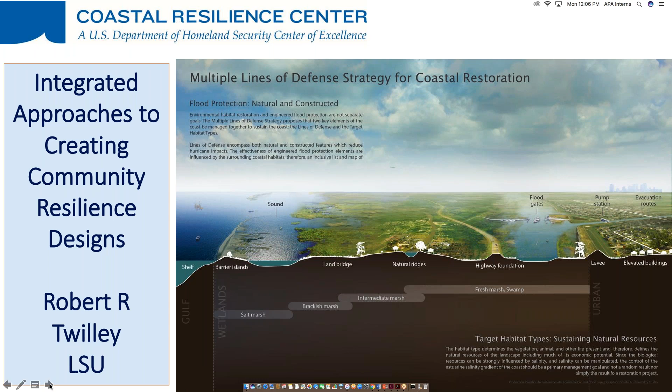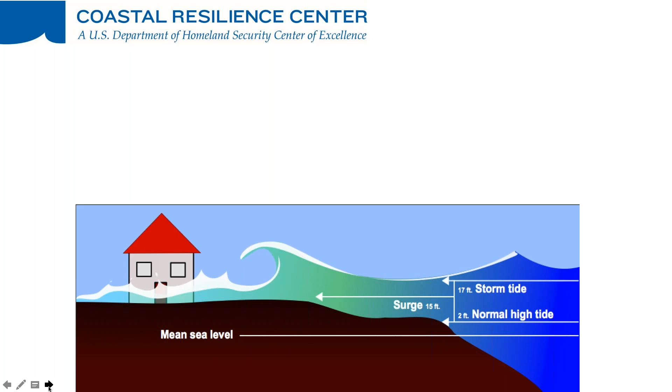There we go. So the issue is infrastructure and storm surge. And just to give you an idea of the magnitude, this is actually outdated. This is from the 2012 master plan. The potential for expected annual damages to reach 7 to 23 billion. And much of that is from flooding and damages due to hurricanes.

And of course, this migration that I talk about, I could spend a whole seminar on it, but basically the land is subsiding and sea level is rising, but more importantly, we don't have the capacity of the river with the sediment in that river to help build elevation to compensate for sea level rise and subsidence.

And thus, those rates of 17 kilometers of the Gulf of Mexico migrating inland is also a big part of the way we manage the river, as in all deltas around the world. But those are the damages, those are the source of those damages. And so our restoration program is to build land with the river, sediment from the river, and reduce risk.

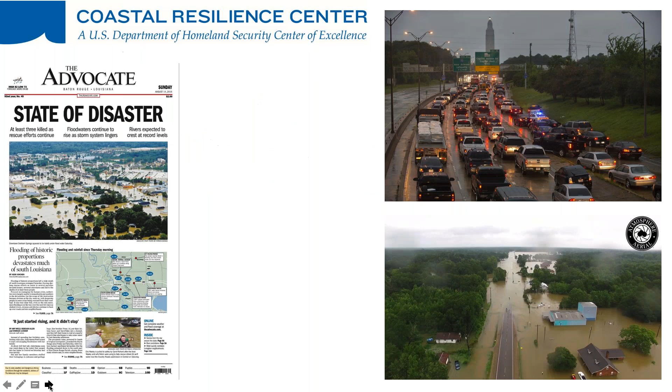Now, we are also dealing with flooding, not only from coastal storms, but as many of you know, from August. In fact, we're about to celebrate the anniversary of the flood of 2016, the Louisiana flood, actually a flood and a storm with no name. But we are also dealing with this interior. In the Gulf of Mexico, the point here is not only a source of flooding from storm surge, but we're dealing with the more interior flooding as an additional issue of reducing repetitive losses.

And so all of this brings us to this tool, which is a visualization tool for storm surge. And we call it See the Storm Surge Before It Happens, which means this is a deterministic model of a specific storm. It is not a probability of multiple storms. It is very specific, and the track and the conditions of the storm can be manipulated to look at scenarios. And it's called CERA, which is a Coastal Emergency Risks Assessment. That is a visualization tool that I'm showing you to the left.

And as you can also see in the bottom right, a very large group of universities has been involved in building this. A large part of this is actually the engine that runs the simulations of the storm surge, which is called the ADCIRC Surge Guidance System, ASGS. That's in the background generating output that tells us the elevation of water at different locations in response to a hurricane or major event. Our visualization tool that you see here expresses that in Google Maps so that you have some idea of where those water elevations would be located.

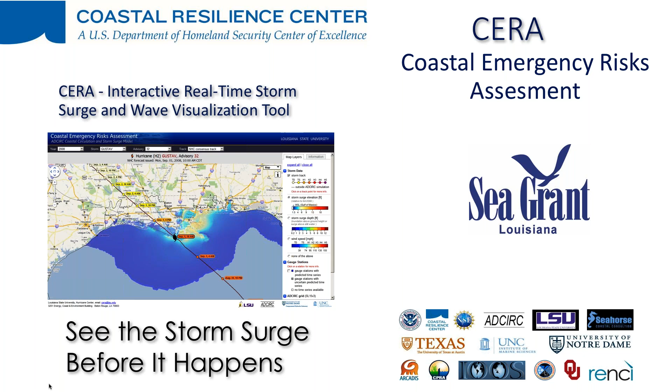And so it was developed actually to address the issue of critical infrastructure. It was actually designed over 20 years ago by Rick Luettich and Johannes Westerink at Notre Dame. Rick Luettich is at UNC Chapel Hill, director of the Institute of Marine Sciences, and built this ADCIRC grid in this model, as you can see off to your left, to help predict what the winds and water conditions would be around New Orleans at these very important canal systems, 17th Street Canal.

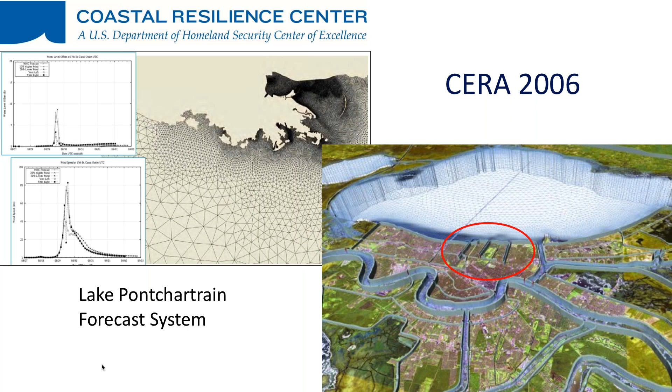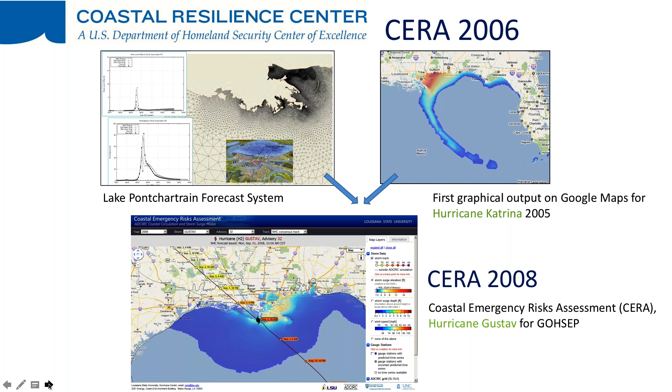And that's why this model has been so effective, is that it can, particularly in a coast like Louisiana, predict water levels around very complicated coastal structures and infrastructure and weirs and levees. And so it has proven to be very effective. Now, since 2005, particularly Hurricane Katrina, we elevated this to where it became a coastal emergency risk assessment, and put a lot of time and effort into visualizing storms during the events, being able to predict water elevations 5 days out, to know the expected risk during a specific event.

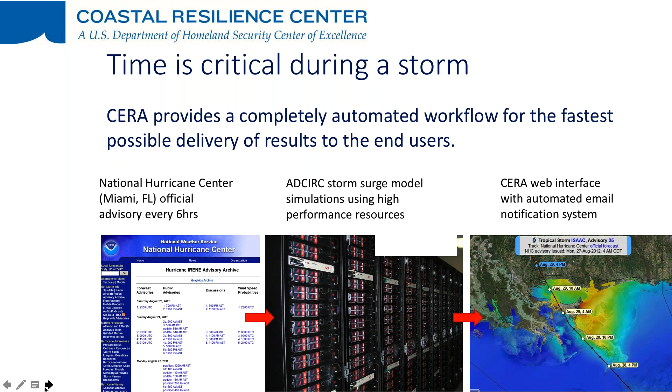It is based on the information we get from the National Hurricane Center, as you see to your left. And we're able to do this because in 2005, the state of Louisiana, as many universities have been doing, invested in high performance computing. Think about it, those are 1.5 million nodes or points where we're calculating water elevations. And so it takes high performance computing to be able to generate the maps that you see to your right, which is the interface of predicting water elevations during an event.

Now, the time is critical, and emergency managers want to know when water levels will reach a certain height. And so we have spent a lot of time with emergency managers in developing this tool, to help them relate to where people and infrastructure are located and planning during and actually right after an event.

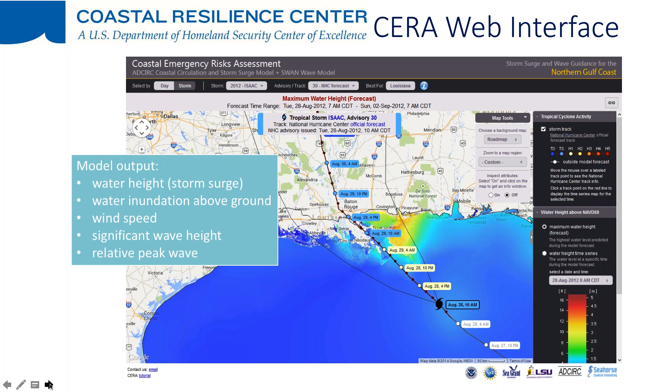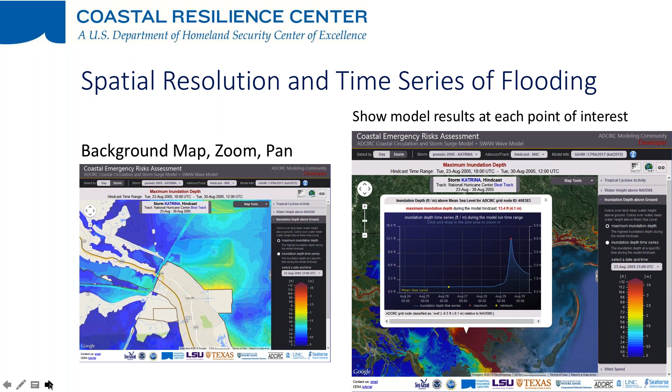Again, very deterministic, based on very specific information on where the storm will be located and the wind conditions of that storm. And so it has proven to be a very effective tool for emergency managers during emergency events. So the question is, how can we integrate this approach and create community resilience and designs using a tool like this and linking it with consequences so we can help with the design and enhance planning for the next event, in hopes of reducing risk.

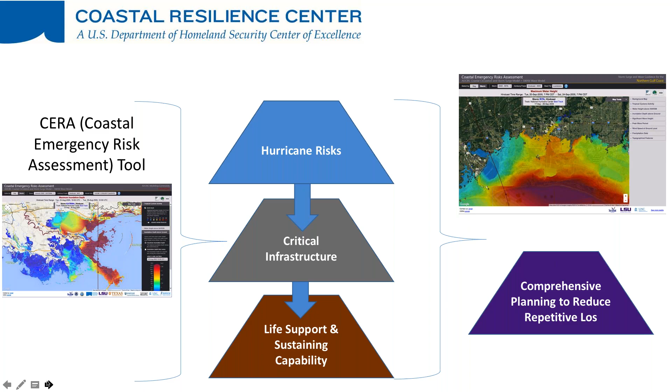And can we utilize these tools for designing green infrastructure, for looking at reductions in water levels with the same storm event? So basically, this integration is taking a visualization tool, knowledge about where critical infrastructure is located and where you would put critical infrastructure, and on the right, can we link this to comprehensive planning to reduce repetitive losses? And that brings us to working with planners.

So at LSU, we have the Coastal Sustainability Studio, which is located in our College of Art and Design, and is integrated with our College of Engineering and with the College of the Coast and Environment, where the Department of Oceanography and Coastal Science is, where I'm located. And it is to try to bring these integrated designs, looking at planning and adaptation and hazard mitigation. And so the question is, with this group, what's the value of a tool that can deterministically tell you what are elevations.

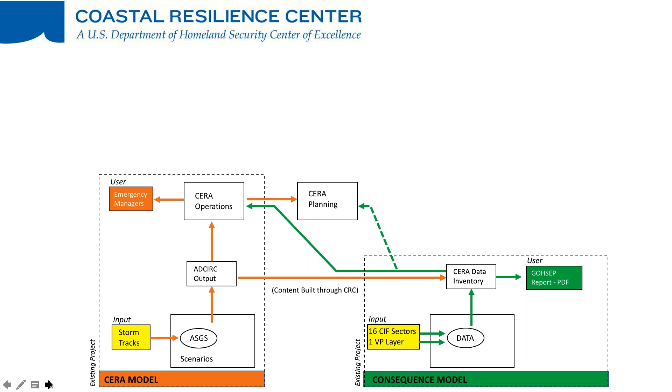So it is taking the CERA model, which is the forecasting or the visualization tool, with the consequences and data of where infrastructure is located, linking these up so that the feedback of where critical infrastructure can be inserted into these visualizations of flooding, and not only help in planning, but also help at the endpoint, which is for planners and users and emergency managers.

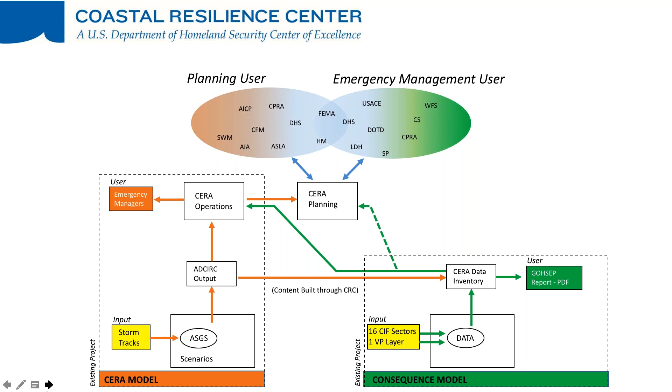Now, let me go back and real quickly say that I think the value of the CERA tool was because we spent so much time with emergency managers, and we found out from them, this is what we need during an event. So part of the discussion today is questions and comments, and is, from the planner or user, what is the value of these types of tools? I'm going to give you some examples. Now, before I do that, real quickly, before I wrap up here in the next 3 minutes,

I do want to mention this starts with a very large data set of where is the critical infrastructure. We had a very large FEMA hazard mitigation grant. GOHSEP is our Governor's Office of Homeland Security and Emergency Preparedness. And it was these GIS hazard mitigation maps that we started with, and you can actually find the maps at this portal. And this is with the Stephenson Disaster Management Institute.

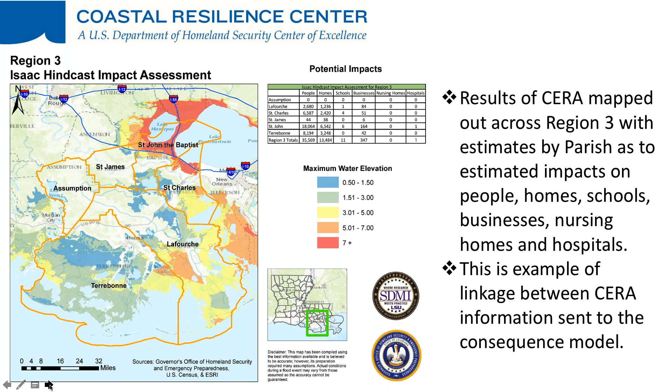So here we're taking some of the information of that critical infrastructure and overlaying it with a hindcast of Hurricane Isaac. And you can see potential impacts, people, homes, schools, businesses, nursing homes, hospitals that are influenced by different elevations during an event. I'm going to show you a little bit, scaling it down to St. John's Parish. We can actually look almost in neighborhoods to see what different infrastructure would be impacted given different hindcasts to look at impact assessment.

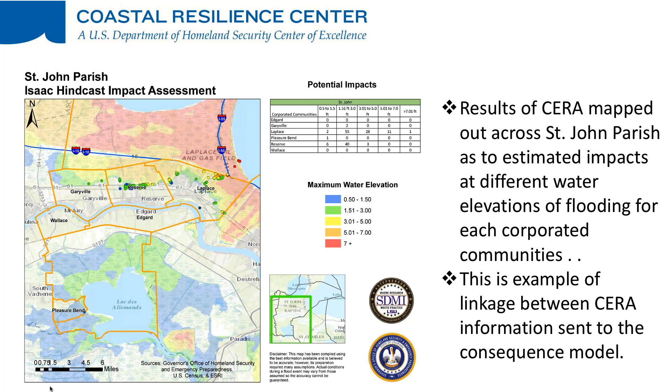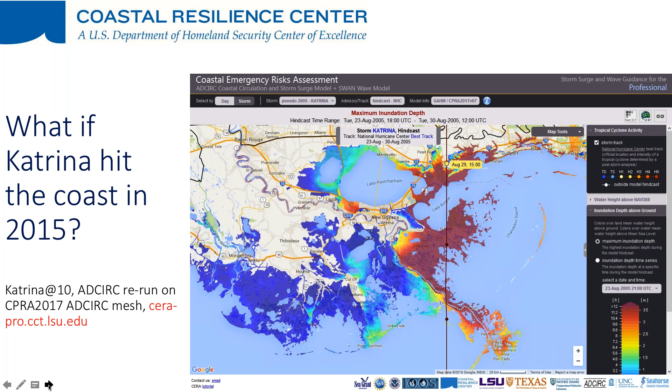And so this is sort of the idea here, for example, after all of the design went into the levees and some of the coastal restoration projects, what if Katrina hit today? What are the reductions in water levels? Taking a storm that we know what damage it did in 2005, look at it post investment in all the resilience infrastructure that has been designed and built since 2005, and look at the flooding. And that's, again, the power of this tool, looking at hindcasts of these events and comparing them.

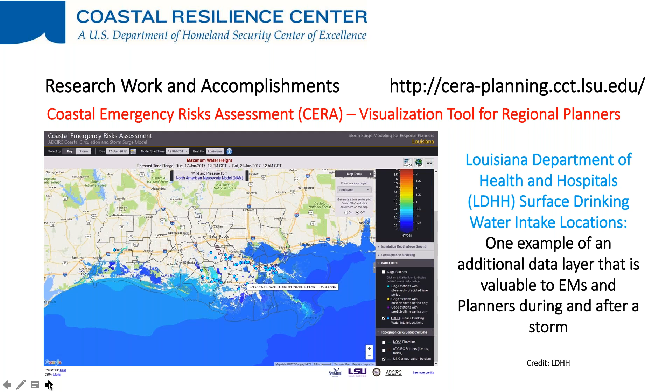And so, to give you another example, we worked with a focus group, and one of their top issues was, for resilience, we need to know where surface drinking water intake locations are. So we can look at different storm events and overlay those visualization tools where the intake locations are, to see if there's some design and criteria related to relocations and reducing repetitive loss.

We took a port resilience index that looks at their various indices relative to how well they are prepared to manage storms, and we can give them situational context, and give them storms and maps and visualizations, so then they can look at that relative to what they are using from a community resilience perspective, and how well does it apply.

That's sort of the goal that we have, and trying to look for and test resilience designs before the storms happen. And I'll stop there.

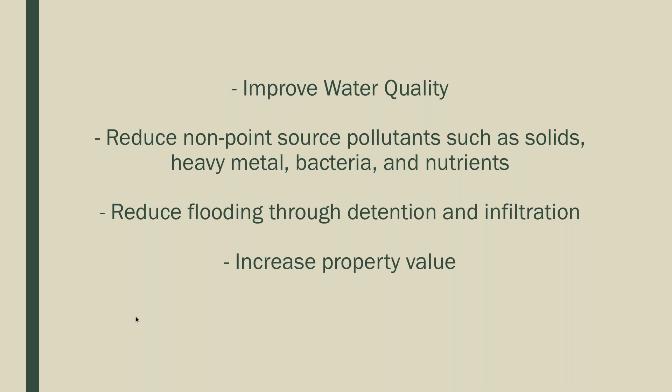So some of the objectives are to improve water quality, reduce non-point source pollutants, such as solids, heavy metals, bacteria, also to reduce flooding and increase property value as it brings urban design features that you will see in the next slides. So the first one would be green roofs.

Green roofs are proved to retain large amounts of rainfall, and they consist of a vegetative layer that filters and reduces rainfall. Some of the outcomes of using green rooftops are to reduce the urban heat island effect and also to enhance air and noise quality inside the buildings. And also it is considered an aesthetic feature in urban areas. So green roofs are mostly effective in urban areas.

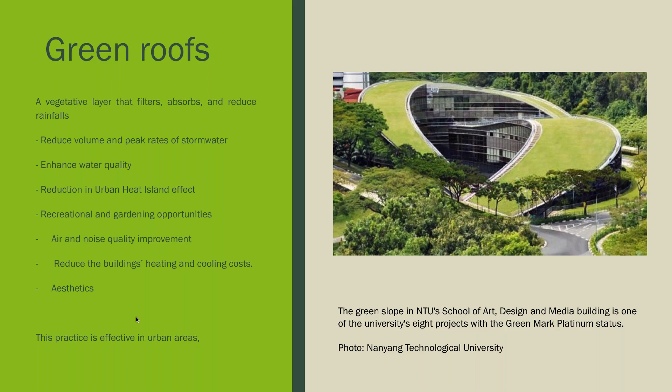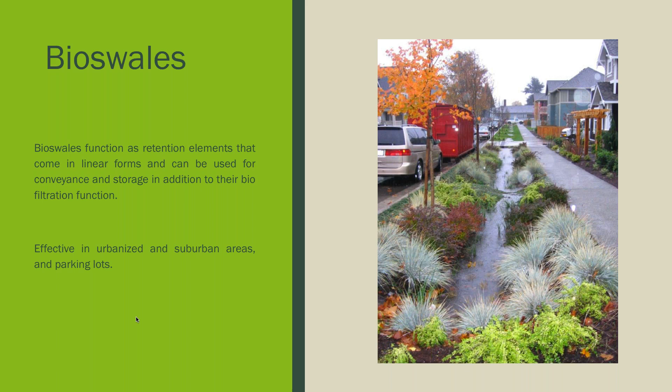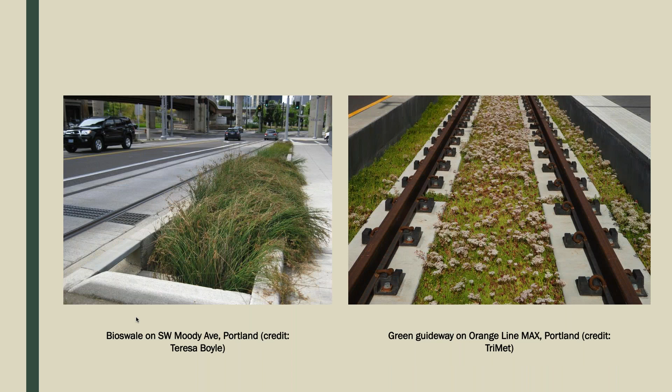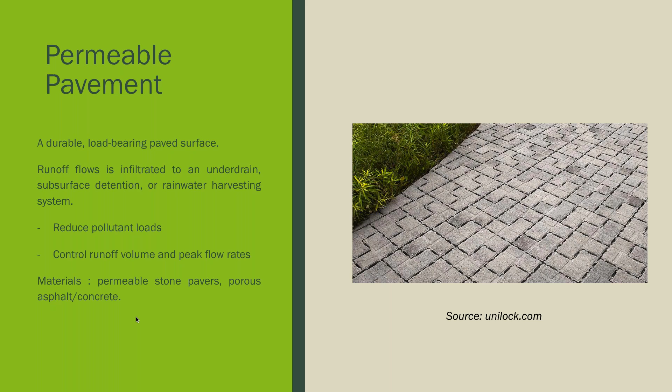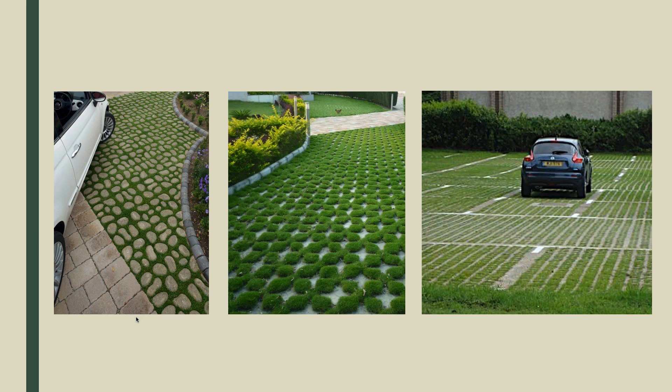So this is another kind of LID, which is the permeable pavement. This is a durable and load-bearing paved surface. The goal is to reduce pollutant loads through infiltration and also to control runoff volume and peak flow rates. The materials are generally permeable stone pavers and porous asphalt or concrete. Permeable pavements can be used in pavements around the roads, but also in parking. And that is why you can call it green parking, because of the surface that is permeable and reduces stormwater runoff. So these are other examples of grass pavement for permeability.

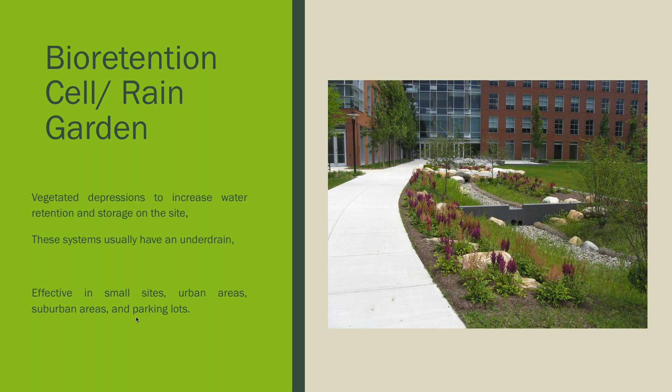Another example of LID would be the bioretention cell, also called a rain garden. These are vegetated depressions that retain water, and they are usually equipped with an underdrain, which is a concealed drain that lets the water through when it reaches the level of the drain. These practices are effective in small sites, in urban areas, in suburban areas, and also in parking lots. So these are other examples.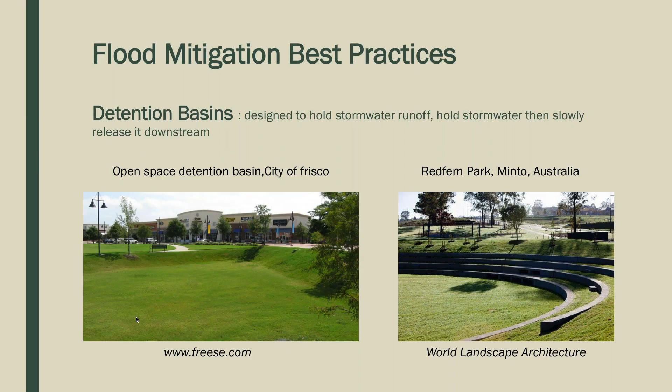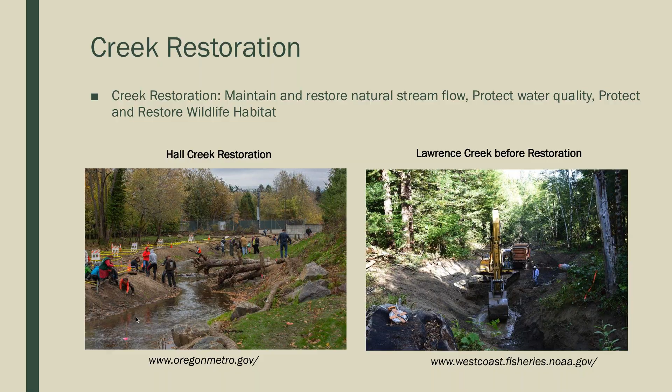So the overall objectives and benefits of green infrastructure are to reduce the urban heat island effect, which consists of higher temperatures in urban areas, and it also affects communities, the energy consumption in buildings, and air quality. It can also be the cause of increasing wind and the change of natural characteristics in an urban environment.

The most negative effect of urban heat island effect can also be the increase of greenhouse gas emissions. So the second benefit of green infrastructure would be the improvement of air quality, restoration of wildlife and natural habitat, economic growth and investment through the creation of green jobs and the implementation of green projects. Additionally, we can mention the reduction of flooding and the improvement of water quality, and finally, the creation of healthier communities and better environmental quality in the urban areas.

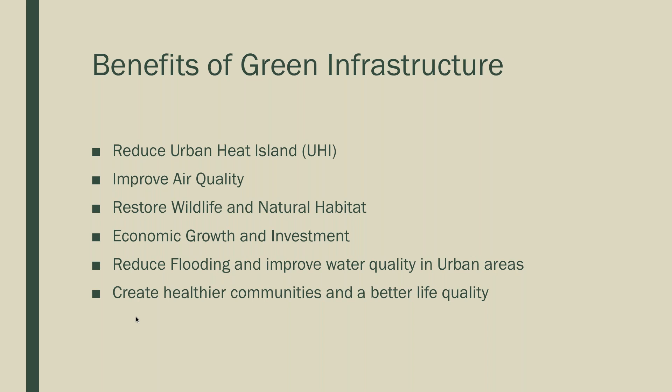Hi, so I'm Gwen Griffin, and I'm in the undergraduate urban studies program at Virginia Commonwealth University, and I'm going to be sharing a case study pertaining to green infrastructure. So the case study I'm going to be talking about is one from Kansas City, Missouri. And their goal was to prevent flooding after storms from the Middle Blue River, and then to reduce stormwater overflows.

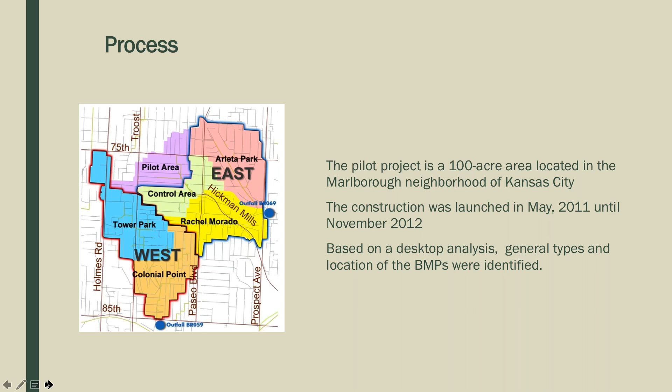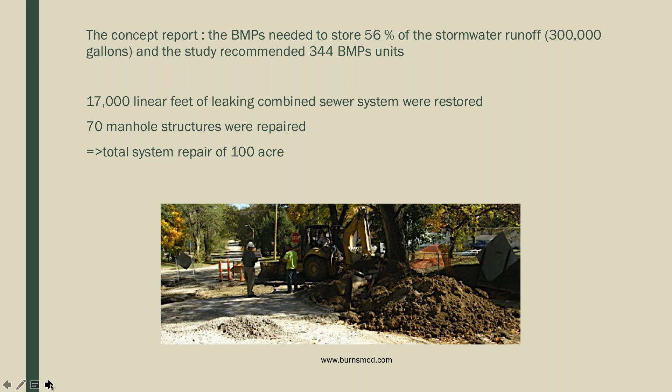So the Kansas City Water Department, along with their utilities department and their planning department, all got together and they created a pilot area to test some of the low impact development structures and best management practices. And it consisted of a 100-acre area within the city, and this project started in 2011. So a lot of the problems were repairing the sewer system and all the pipes underneath the ground, along with helping the water infiltrate slowly. A lot of those challenges came from the development within the city and how the sewer systems were set up.

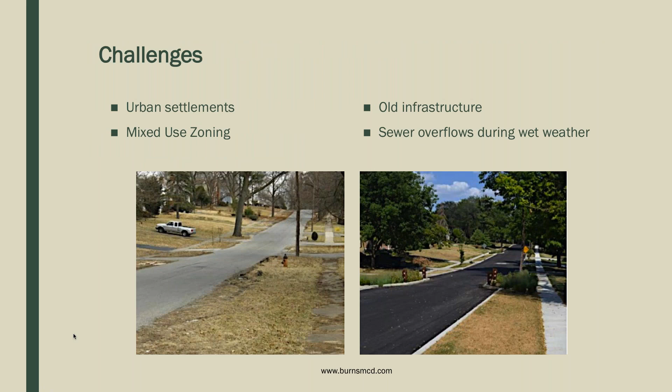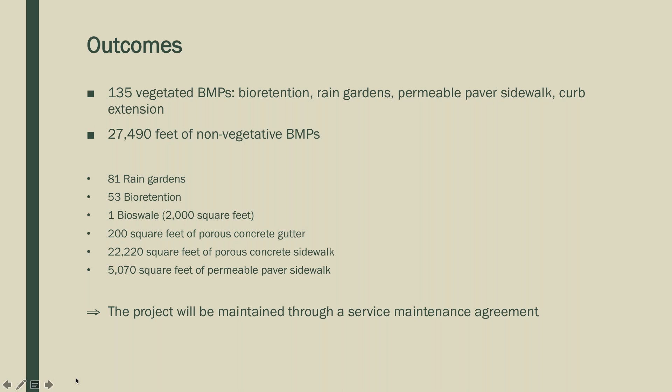So a lot of the best management practices were kind of what Samaya just explained. They used a lot of different structures such as rain gardens, putting in more permeable surfaces, curb extensions that were vegetated. So the best part about this project was the community and public involvement. They were able to get the community involved to maintain some of these, the bioswales, the curb extensions within the neighborhoods, and the different rain gardens.

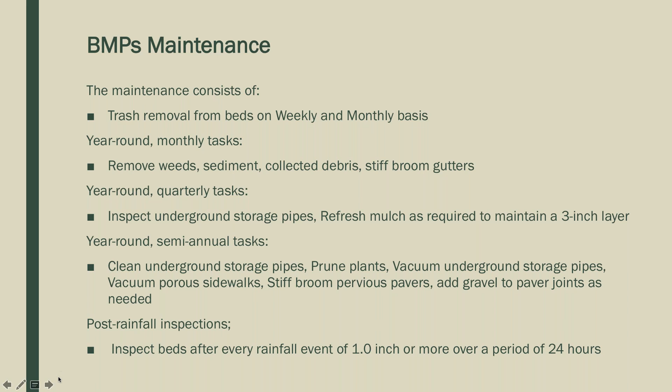Some of the practices and how they were able to get the public involved was meetings within the neighborhoods, going door to door, and then pancake breakfasts to get people out in the morning. And that's how they were able to talk about why it was important, how they can prevent flooding in their neighborhoods. So they were able to get a lot of nonprofit organizations involved in this project to help the Kansas City Water Department in order to decrease the cost. So overall, the city ended up with a pretty good project in reducing flooding and leaking within the pipes.

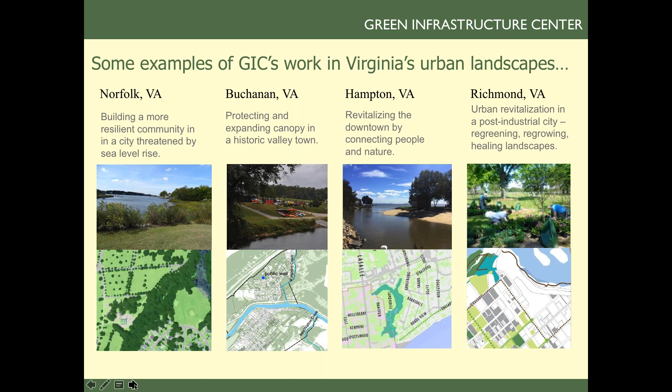And in Richmond, Virginia, which is our longest running sort of urban pilot, where we've mapped the entire city and then also have installed specific habitat restoration projects in the city to demonstrate how you can go from a city level planning to site specific solutions.

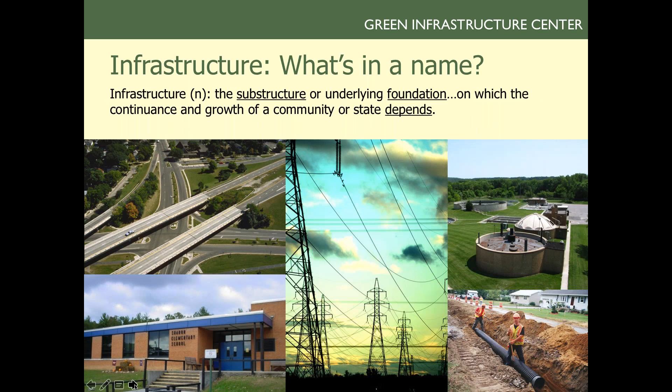So just quickly, I just want to take a step back and talk about infrastructure for a moment. We all know what gray infrastructure is: roads, power lines, pipelines, all the things that lead to civil society. So when we're talking about green infrastructure, not gray, so gray is on the left-hand side here. Green infrastructure is literally the green stuff: the trees, the wetlands, the lakes, all of the natural services, the natural resources that provide services for us.

So on the right-hand side, we add the tree canopy, and now we've got a key component of our infrastructure that's helping keep our cities cool, creating oxygen, taking volatile organic compounds out of the air, providing shade, and also uptaking stormwater.

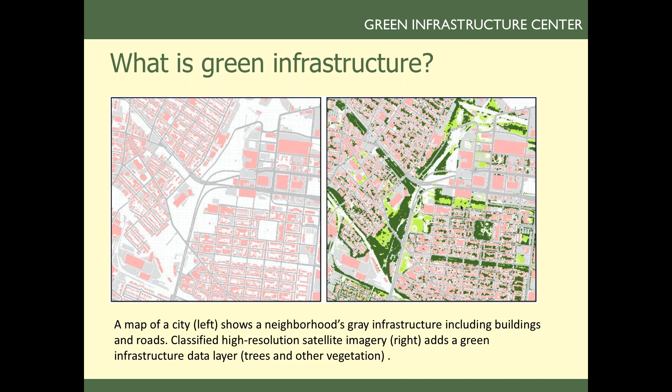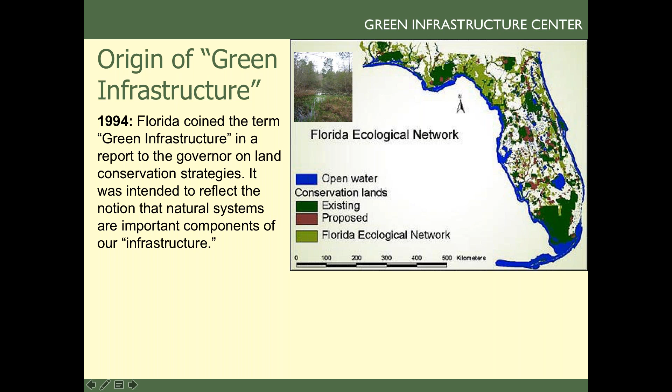So the term green infrastructure actually comes from Florida, and for those of you who may not know this, in 1994, state employees and folks working on a river conservation program came up with this term to try to explain to the governor that the natural resources of Florida were also part of their infrastructure. And when they talked about it, they were specifically talking about resources like Lake Okeechobee, the Everglades, the River of Grass, the wonderful forest in the Panhandle, the beaches, the dunes, all of these natural assets that create a healthy community and a healthy economy.

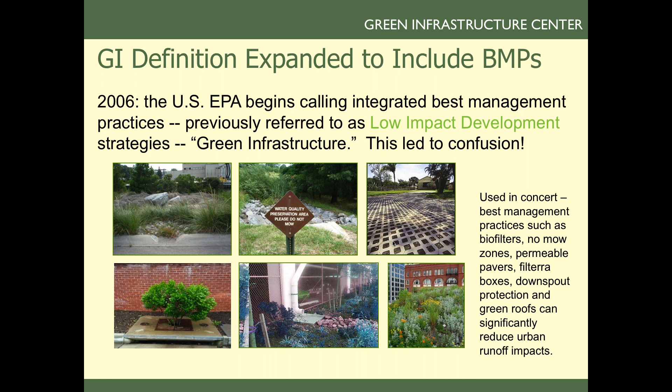In 2006, the EPA actually started calling everything green infrastructure. So previously, we referred to all these various best management practices as bioswales or Filterra boxes or green rooftops or permeable pavers as best management practices that used in concert create a low impact development strategy. And so now everyone got confused. Are we talking about trees and dunes? Are we talking about bioswales? What are we talking about? So the way that we look at it is we refer to natural green infrastructure and then constructed green infrastructure. But I want to remind everyone that trees are the original green infrastructure.

And why I bring this up, just very quickly, I work a lot with developers pretty much every day. And working with a nonprofit developer, they're very excited about their site plan because they told me that it had lots of bioswales, so it was going to be very green and I would love it. I asked them where the bioswales were going to go and they said, well, here, here, and here. But first we have to cut down these trees because they're in the way.

Now I'm sure everyone on the phone, I hope you're rolling your eyes at this point because we don't want to cut down trees to put in best management practices to try to replicate what the tree did. And in that particular example, they did realize that actually we should keep the trees. So I really like to harp on this because it's really important to first protect our natural resources. Trees give us all of these benefits first before we start constructing things. And also, trees are tremendous for stormwater management.

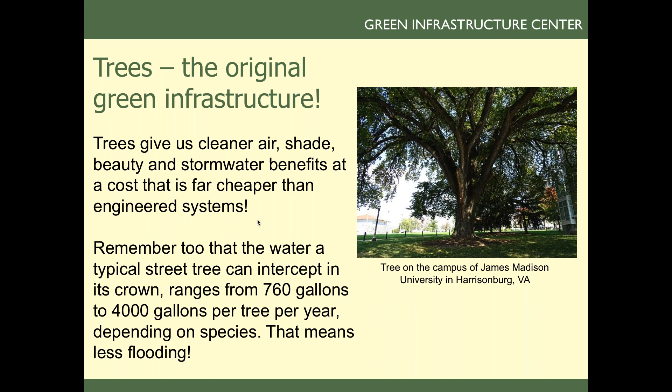We don't have to construct them, we can plant them, but a mature tree can take up anywhere from 760 gallons to 4,000 gallons per tree per year. And you multiply that times all the trees in a city, that's a tremendous benefit. It also means less flooding.

So, the key is right order thinking. Protect your trees and natural vegetation on site and across the landscape is step one. Build in the least impactful manner, smallest parking lot possible, smallest building footprint possible, and then mitigate. So first conservation and then mitigation.

And again, we ought to talk about that because we see so many site plans where they've removed all the natural infrastructure and then try to reconstruct what they've destroyed. So if we preserve as much on site first, we don't have to spend as much mitigating.

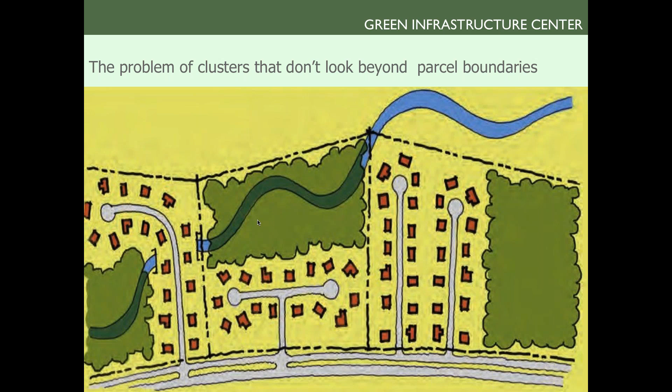So we also are very concerned about how much green space is left in individual development sites. And here's an example of 3 sites where each person left some green space. But if you notice that green space does not connect, you can keep the land connected, but only if you plan at a larger scale.

So here we have, if we've mapped our green infrastructure ahead of time, we know about our river corridor and our riparian zone and our buffers. Perhaps the site on the left is low or little in development, or it's a preserve, a conservation easement, or a park. In the middle, moderate development, and on the right, high-level development where you have room to accommodate it.

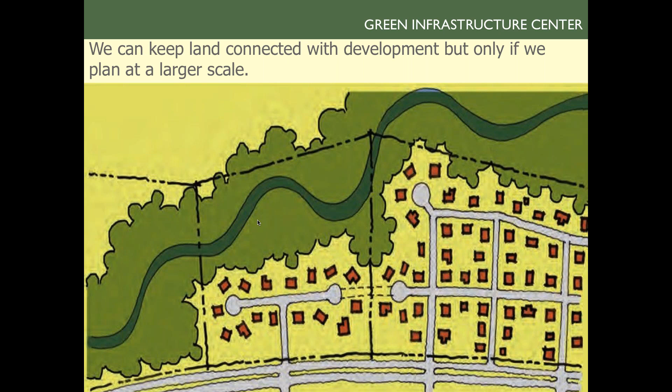But in order to do that successfully, you've got to have a map. And that's why it's really important that your community, your city, your county actually create a map ahead of the development so that we can realize these benefits.

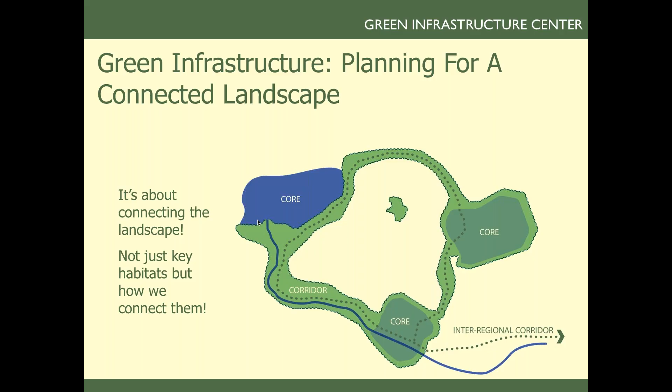So trying to think about a connected landscape, there are lots of tools and models, whether you're in the urban region or whether you're rural, to create a map of your largest intact landscapes and their connecting corridors. In Virginia, at the state level, there's a model available called VaNLA, Virginia Natural Landscape Assessment, and that has a map of all the largest intact habitat corridors, the sort of larger landscapes of 100 acres or more.

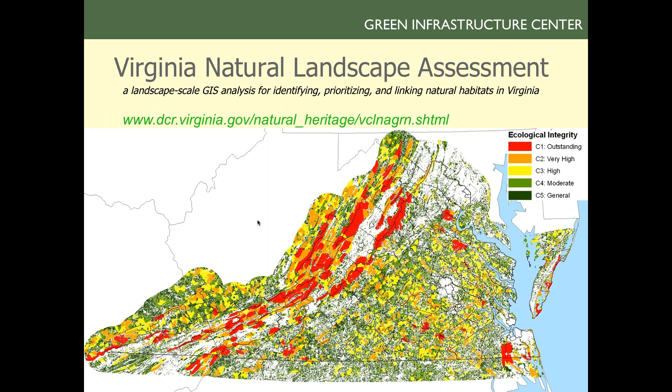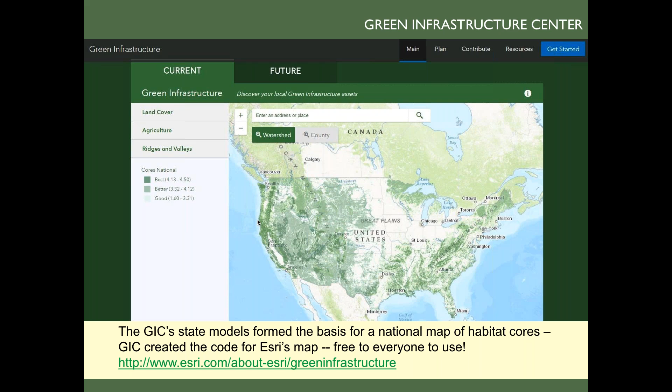And then if you're in another state, we actually built a model for Esri in the past year that you can go to and download the data for your state for anywhere in the country. And so you can just Google, don't try to write down that web address, but Esri Green Infrastructure. And you'll get to that model, and it's a pretty neat tool. And again, the data were created so that you could have them for free.

But there are many planning applications to this work. We talk a lot about stormwater management so far today, but lots of reasons to do this work, whether you're doing park and open space planning or heritage tourism, trying to figure out the most strategic places for conservation easements, road planning, etc.

Comprehensive planning is obviously something that most of us, I think everyone on the call does, but it's really important to make sure that your comprehensive plan has really good data in it. Oftentimes I find very bare minimum maps or just transportation maps, but often not good maps of natural resources. So think about how to get those involved.

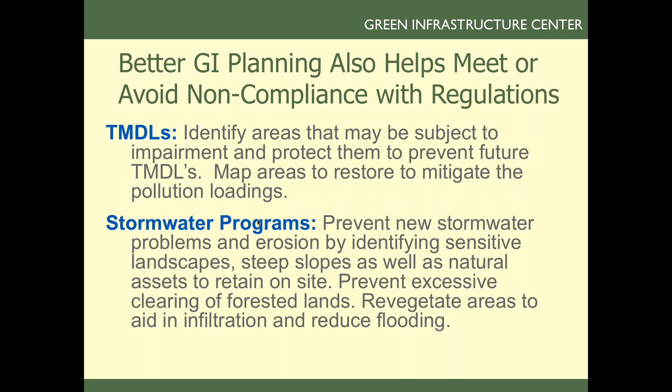And also think about the fact that this work can also help you with compliance with total maximum daily loadings of pollutants, TMDLs, if you have to figure out where you need to be most strategic in restoring, or stormwater programs. I'm going to talk a little bit about that.

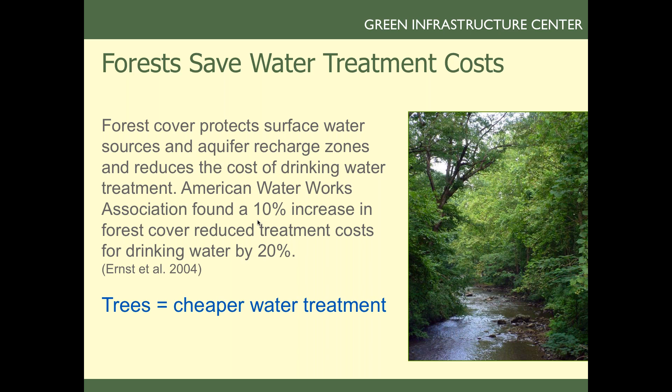So forests really help us with a lot of benefits. Again, the natural green infrastructure, American Water Works found that a 10% increase in forest cover can reduce treatment costs by up to 20%. So trees actually give you cheaper water treatment because the water arrives cleaner to your drinking water intake or your reservoir.

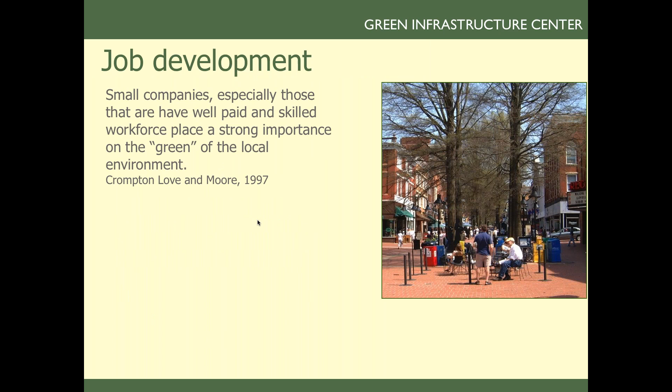Also, urban canopy values, people actually spend more and shop longer when there are tree-lined shopping districts. So it's worth investing in those street trees because they'll pay you back in tax revenue. Job development. So people are always talking about they need more jobs. Well, it turns out that the greener your community, the more likely you are to attract green jobs to your community.

And again, my talking time was cut by the panel being a bit behind, so I'm having to talk a little fast. Sorry.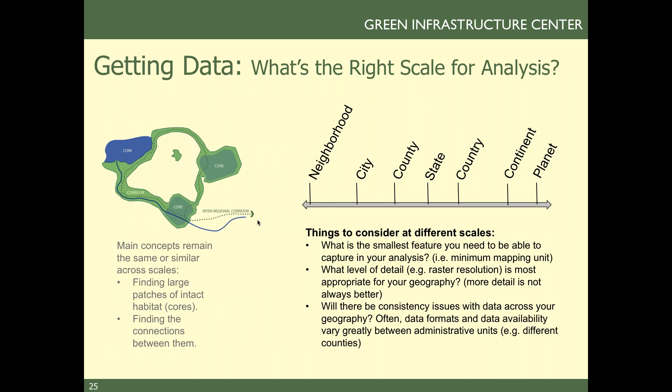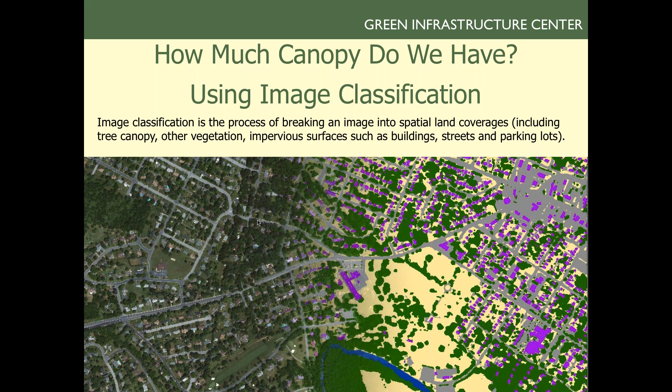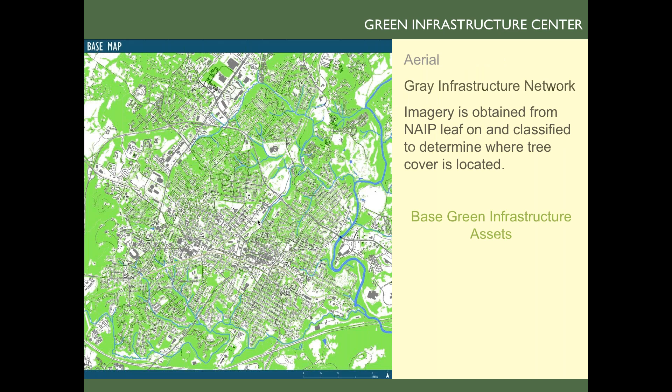So I'll just say that there are a lot of different things that you can evaluate for urban forest canopy, but that is the first step in trying to understand how well your trees are working for you in absorbing your stormwater. This is an example of Charlottesville, where I'm talking from now, just looking at gray infrastructure, adding in the canopy and the green infrastructure.

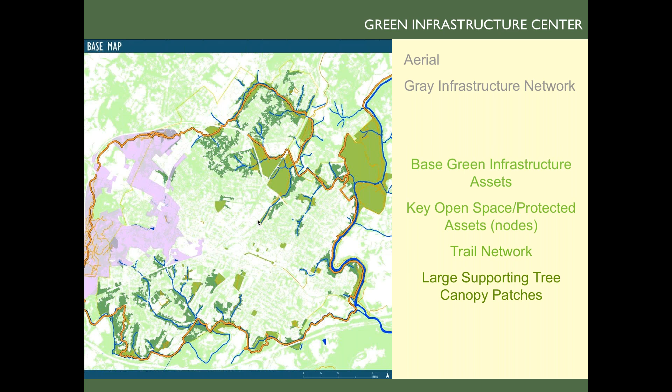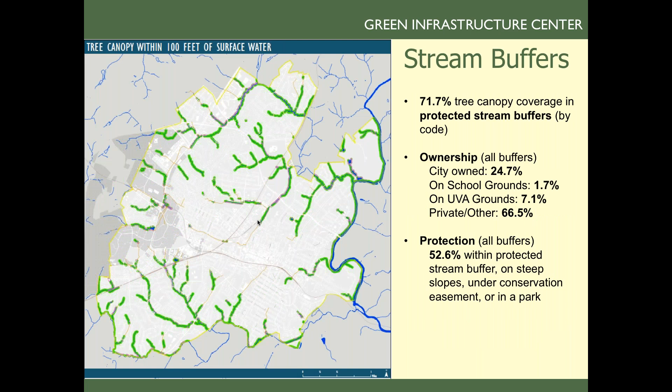Then we can actually start to understand where our nodes are, our most intact resources, how they connect. We can add in our trails. We can actually add in the pathways across and figure out the green streets and the nodes that connect the people. So sort of creating these green threads throughout the city and looking at how well canopied and shaded those streets are. And looking at ownership, stream buffers, how well buffered those are.

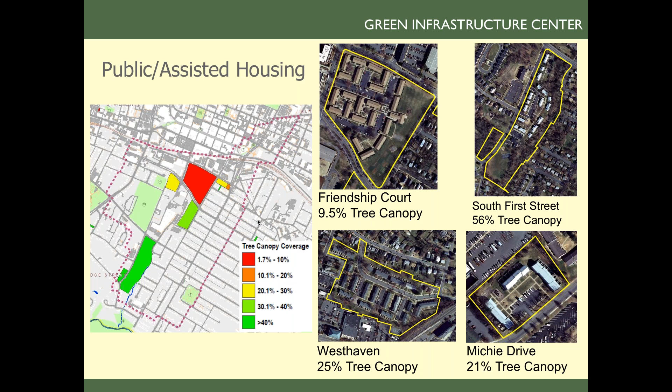We can also look at entrance corridors and how well those are greened, how well those trees are helping with stormwater management. We can look at public and assisted housing as well. That's getting into social equity, because I find in cities mostly the public housing sites are not very green and not pleasant environments to be in.

You can also play with your parcel data and start to throw in metrics on what's important. So I don't expect you to absorb this right now, but red is the least benefits and green is the most. And this is something that Jen Cotting would get into. But you can actually weight your parcels for which are most important economically.

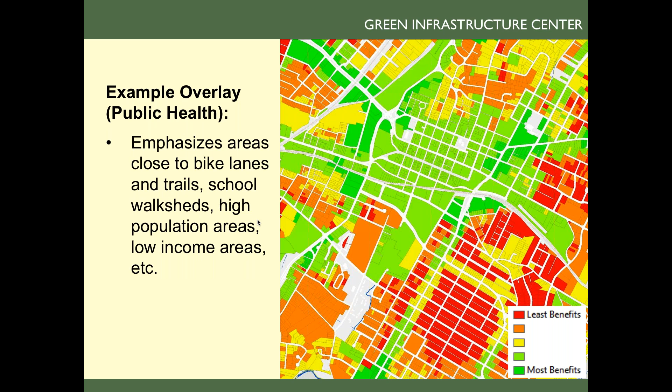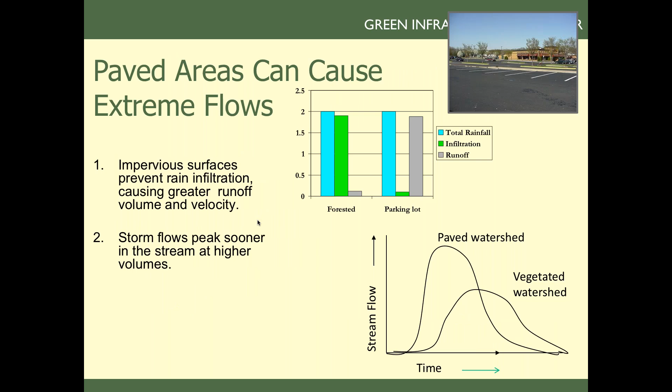Then you could play with public health and re-rank your values for what's important for public health or for environment. And then you can even stack all those values together to see where you get a triple benefit, triple bottom line. Trees are really important for stormwater management, as I said, and I'm just going to flip through to the end here because, again, I think my time is out.

But the question is, how do we make cities work like forests? And so lots of ways to add buffers, but they don't work without stormwater management. And I'll just end on this slide because, again, we're out of time.

But we actually have a grant from the Forest Service to work in 7 southern states in 13 cities, and in Virginia, that's Norfolk, Harrisonburg, and Lynchburg, and we are calculating the stormwater benefits of the trees. We're looking at sea level rise, we're looking at habitat restoration, and we're also looking at building resilience.

And the key takeaway point from that is that oftentimes the solutions to the stormwater problems and coastal flooding is actually upland, where the areas are more impervious. And as I said, in the interest of time, I'll end with that.